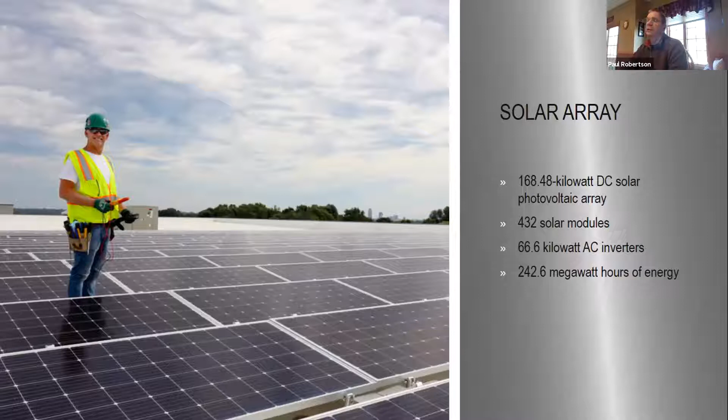Like I mentioned, if you want to advance the slide, Amanda. This system at 168 kW supplies about 24% of the office electrical needs, and we have a good sized office with lots of efficiencies in that office as well.

We do have a couple notes there about what that equates to, offsetting 20 million smartphone charges, 171,000 pounds of coal, and these are all annual figures. And based on the size of this array, this could annually supply the power to 20 homes in Iowa each year. So good sized array, and we were excited to put it up.

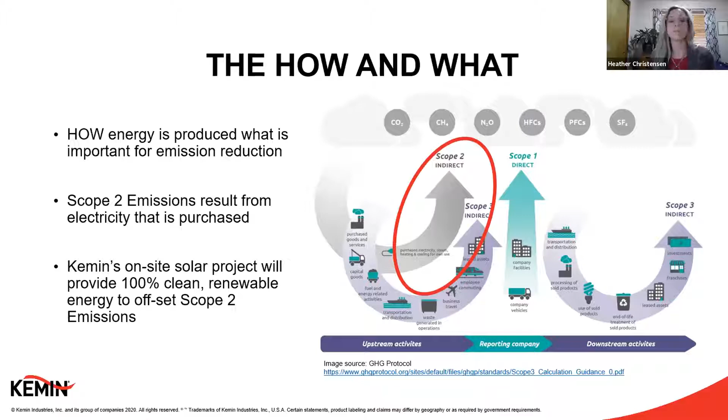The project details are that we are providing solar to approximately 90,000 square feet of our global headquarters. The construction is taking place in 2 phases. The first is a fixed tilt roof mounted array, and that system is 388 kW on our headquarters roof. The system starting construction and installation right now is another 331 kW, representing a single axis active tracking ground mounted system that will be completed by the end of the year. The total system size for this will be just over 720 kW when complete.

We've been working with Ideal Energy from Fairfield, a leading solar energy company in the Midwest. We've been able to tour some of the other facilities where they've done installations and see some of the options during the design plan for this.

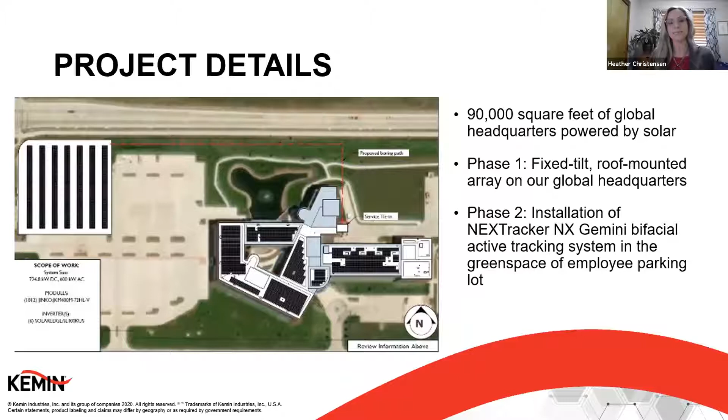Here is a nice shot where we're looking at our global headquarters building when construction was just beginning on the rooftop. In the background, you can see our crop sciences greenhouse, and then some of our other encapsulation facilities are off to the right of the screen there.

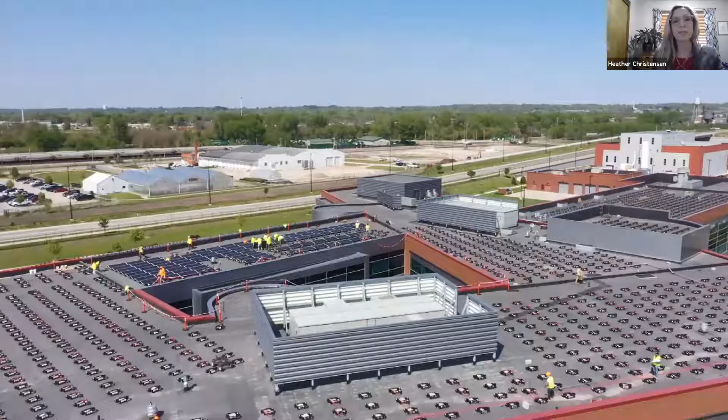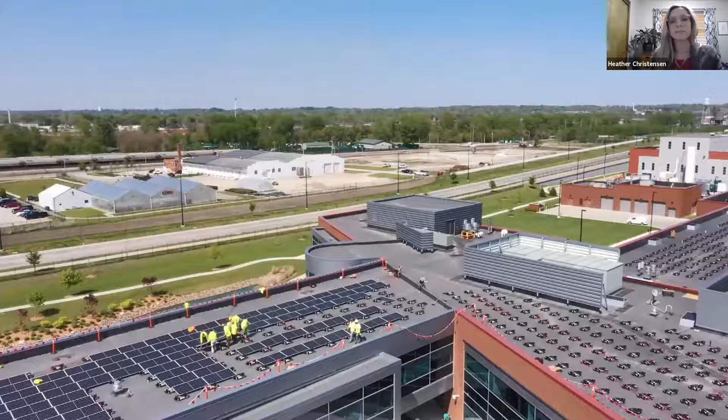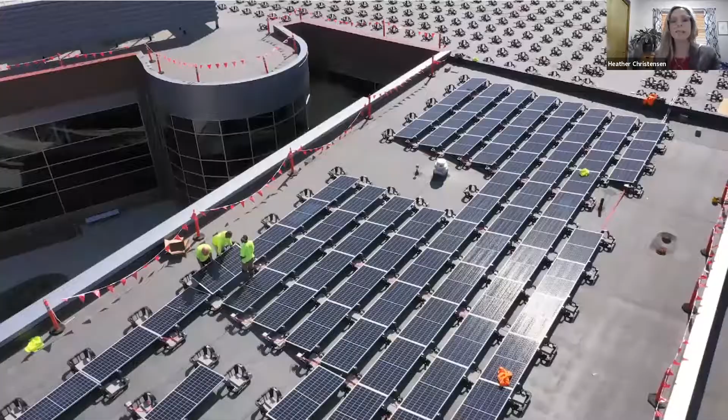Here's another view where we're looking down on the installation progress. Now I want you to pay attention here when we start the next video. This is looking from the corner of Martin Luther King and Southeast 18th Street, and you'll see that green space in the front of that parking lot there. This is our global headquarters again, the employee parking lot, and we can see a little bit of the rest of the campus here. We sit right on the front of the corporate campus. We have a lot of our manufacturing facilities that start to come into view in this scene as well, showing kind of how big the campus is.

The next shot here is the completed solar panels on the roof. This is, I believe, in July of this summer when the installation of the panels was complete, and we can see the coverage there on the roof.

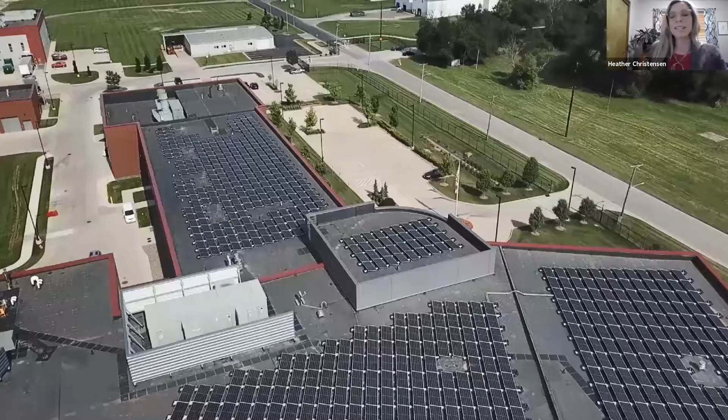Okay, so phase 2 of our project has just begun. They've been drilling the borings that go under the parking lot to the main electric, and they will start installing the panels here this next week. This is positioned in that green space that I showed you that is on the northeast corner of MLK and Southeast 18th.

These panels will also be bifacial, and that will add additional efficiency, especially on overcast and snowy days.

So quickly, I'll go over the project benefits that we're seeing from this. The solar installation is going to reduce Kemin's CO2 emissions by over 18,000 metric tons over 25 years. This is equivalent to 300,000 trees planted and grown for 10 years. This really demonstrates Kemin's commitment to the clean energy transition, and this is something that's hugely important to our customers, our employees, and our stakeholders.

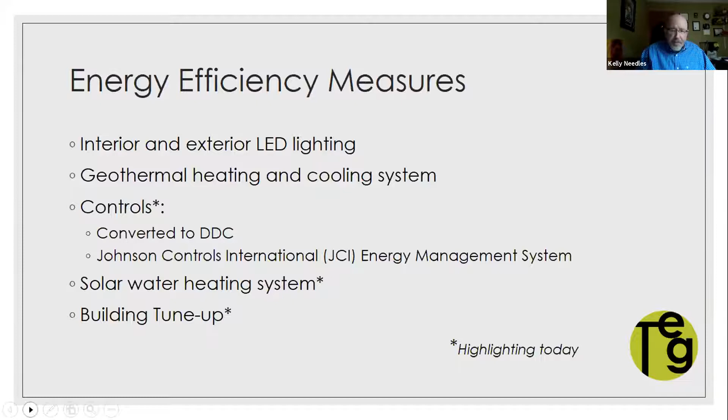Next slide. Got a few similar to the previous slide. Probably one of the biggest upgrades we made throughout the district is getting everything onto a Johnson Controls system, so we can have remote access from anywhere in the city, or even remotely, to adjust set points, respond to hot and cold calls, creature comfort issues, and adjust setback. Many schools within the district have different schedules based on after-hour activities, community use, and so forth, and this helps us stay ahead of things from a preventive maintenance standpoint.

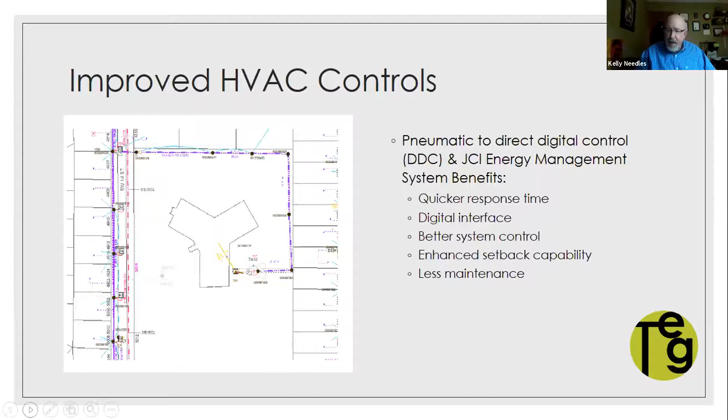Next slide. Some economic things to look at relative to this particular building - we've got energy savings that we identified.

Something Jeremy mentioned during the Waldinger presentation - we've modeled, from an energy modeling standpoint, all of the Des Moines school buildings. So we have access to go in and tweak those models and identify economic impacts from potential improvements. Some of the things we found during our building tune-up walkthroughs: when a new gym was added, there were ventilation and exhaust fan issues, and doors open to that space that should have been closed, causing increased energy use. These are low cost, no cost improvements that don't come with significant capital expense, but do save the public money.

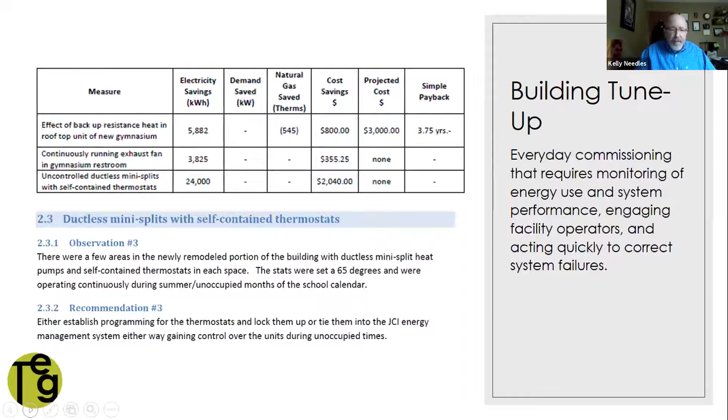This is the fairly small solar thermal project. We entertained two solar thermal initiatives within the district. One was the Hoover High School pool, which was an exorbitant facility, and to provide solar thermal hot water to that system we would have had to cover the majority of the real estate at the Hoover Meredith campus. So the decision was made not to pursue that one, and instead investigate domestic hot water systems similar to the one you see here at Wright.

Weeks Middle School, I think - the one out by the zoo. Anyway, there are two solar thermal systems, one about twice the size of this one, and this particular one that we chose. These pictures are from a case study we developed for IEDA, who are also interested in the technology. One of the good things about this project is it came with significant savings, but it was also a package system the district could buy and install themselves. It came with a fairly low payback in our opinion - a little less than 9 years, a little more than 8. Given all the other energy saving projects the district has entertained, an 8-year payback is actually pretty good for Des Moines schools.

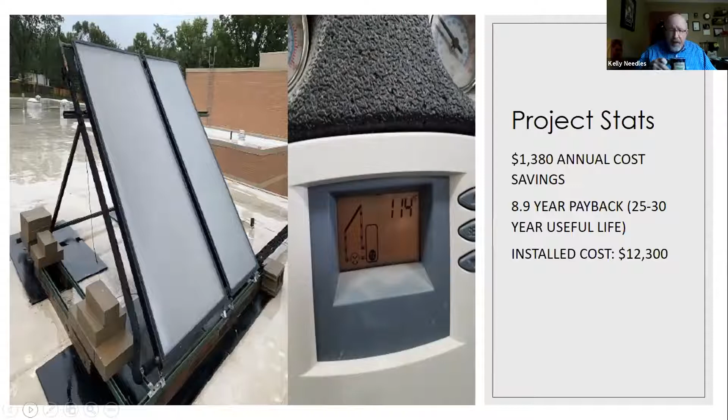All the 2- and 3-year payback projects have been kind of gobbled up. So as we continue to try to continuously improve from an energy use standpoint on an annual basis, this is something I believe they'll be committed to looking at, primarily in all-electric facilities where fossil fuel is not needed.

Next slide, if you can. This is just a diagram of the 120 gallon system, to give you an idea how it works. Very simple to use, very simple to install.

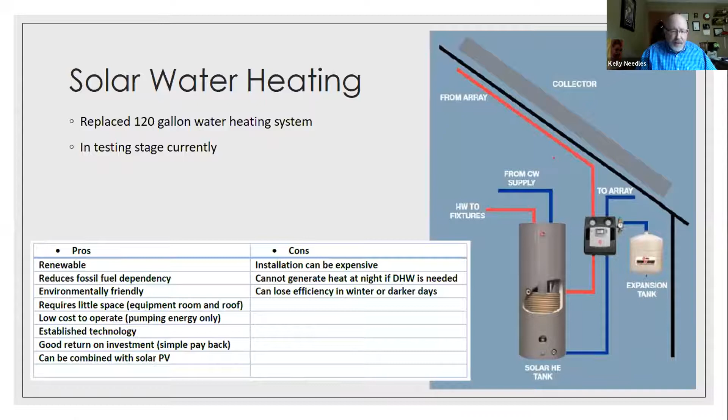Next slide. I think it's important that we highlight Des Moines Schools' commitment from an ethical standpoint to efficiency. Many times when we do these presentations, we're identifying significant capital improvements, simple paybacks, energy savings - we've all seen that.

Des Moines Schools looks at efficiency from an ongoing review of every single building. If you go onto the Des Moines Schools website, you'll see they have an energy report card that is updated for every building within the district. They show comparisons from month to month, this month this year to this month last year kind of thing.

They're very action oriented. It gives you an idea of how committed they are, even from a staff standpoint. If a faculty member within the district wants a coffee pot, a microwave, or a space heater, they have to pay for it, they have to pay for the energy that goes into it. So they know that, and they seem committed to it. We've even got faculty and staff buy-in, and then obviously being very, very action oriented.

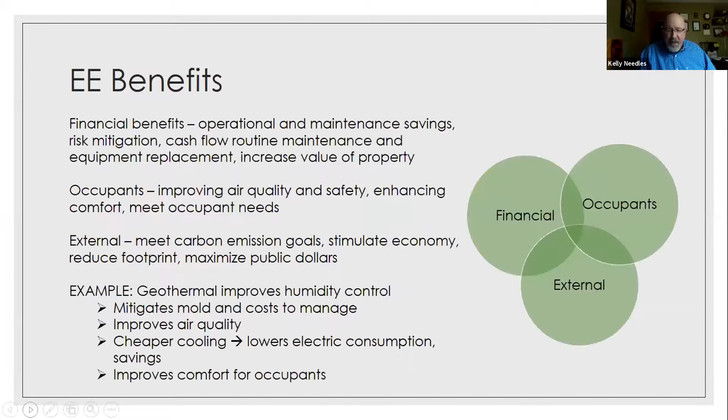We meet every week, even virtually now, to talk about what can be done to save money on an ongoing basis. So anyway, that's the extent of our presentation. Happy to answer any questions that you guys might have.

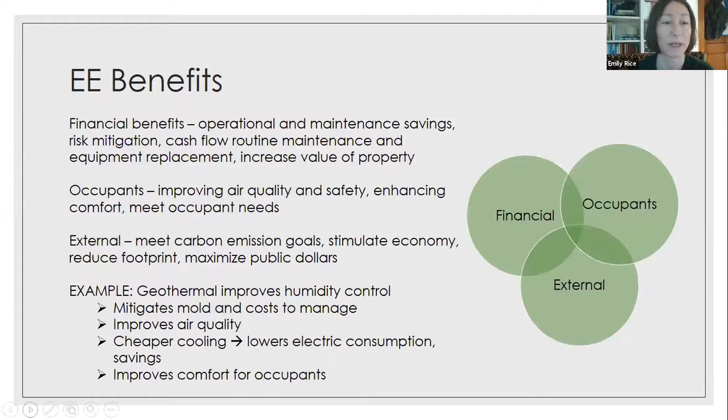I'll note too, Kelly already mentioned this a little bit, but sometimes we're looking at the more attractive, larger scale projects, but really I think the true winner with DMPS is the slow and steady. The fact that they're constantly monitoring and making tweaks helps them get ahead of things that could be huge energy dumps or big preventative maintenance issues.

I think the motivation for DMPS is 3-pronged. They know that it has a significant financial benefit. They're thinking about the people that are using their buildings and the community around them, and they want the space to be comfortable, productive, and safe. Then there's the external motivation - they're definitely driven by the fact that they want to reduce their carbon footprint and be good stewards, and there's the added benefit of stimulating the economy when they continue to implement these projects.

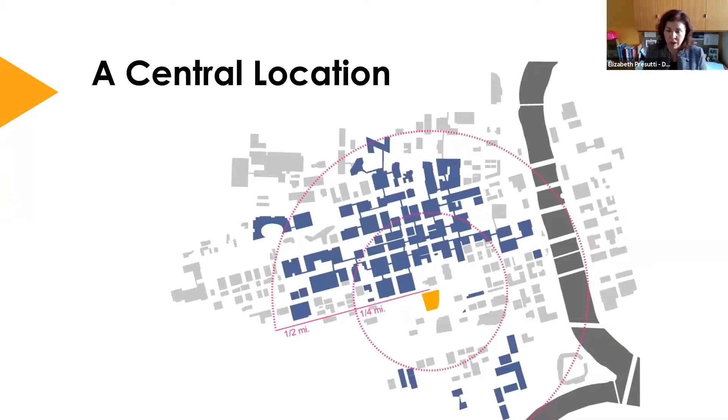From the inception of this facility, we really wanted to make sure it was as sustainable as possible to emulate the sustainability of public transportation. The facility is very centrally located in Des Moines, very walkable, and we were able to utilize an undeveloped site and actually reduce some parking spaces in Des Moines. The lot had a warehouse on it, as well as a parking lot that was utilized for Wells Fargo.

We also incorporated a really smart design. We looked at how we best use stormwater, integrated geothermal heating and cooling systems, and have a variety of different transportation options, of course, solar panels, recycling, and all the things you would anticipate in a sustainable facility.

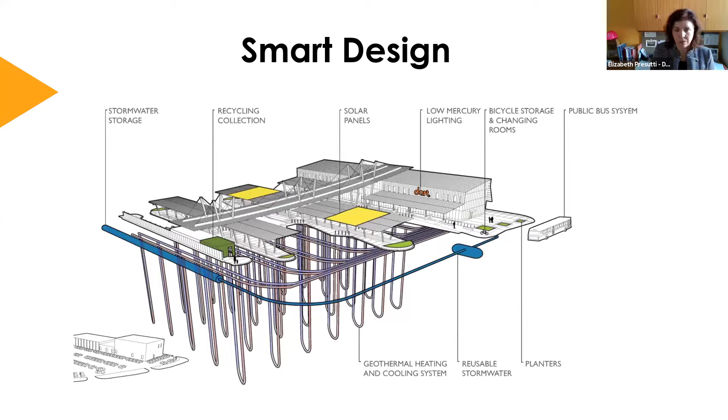We really worked to ensure that we had a lot of daylight and sun access. Our operations and maintenance facility has like 4 windows in it, and as we built this, we really wanted to make sure we had a lot of windows. So 93% of the space is daylit, and 90% of the space within the building, somebody can view the outside.

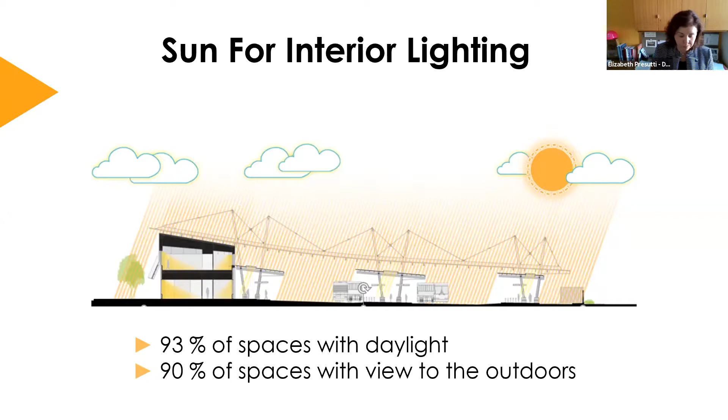Again, we use sun for power. We have 178 solar panels, and since the building opened, we've produced over 375,000 kilowatt hours. We've estimated that cost savings to be over $40,000. We've also seen a reduction of CO2 by over 317,000 pounds, or 158 tons.

On a sunny day when it's 65 or 70 degrees outside, we do hit net zero and overproduce enough to get a payback from MidAmerican Energy. Our investment on the solar arrays as part of that project at that time was just over $200,000.

On an average month, our gas bill is about $30, and we do run 2 instant hot water heaters and a backup generator, which is also on natural gas.

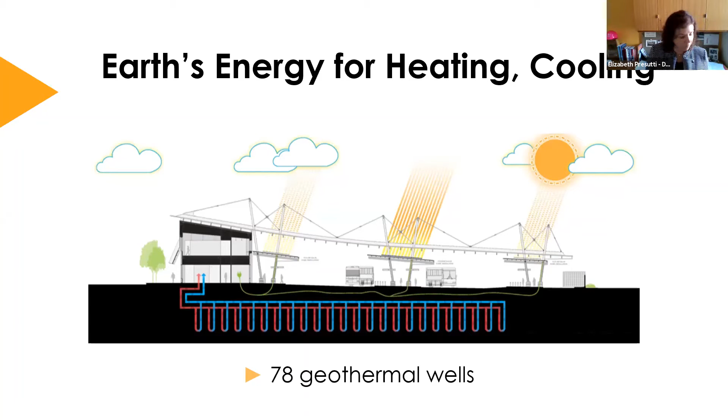We also thought about the stormwater component, given the roof space and the impervious surface on the site. So we have a 20,000 gallon cistern system and also a 500 gallon internal tank.

We've saved over 4.8 million gallons of water in the 8 years that we've been open, and estimate that to be a savings of around $28,000. The investment on that cistern was $130,000, but we believe that being able to reuse that water and not put it into the stormwater system has been helpful for everyone.

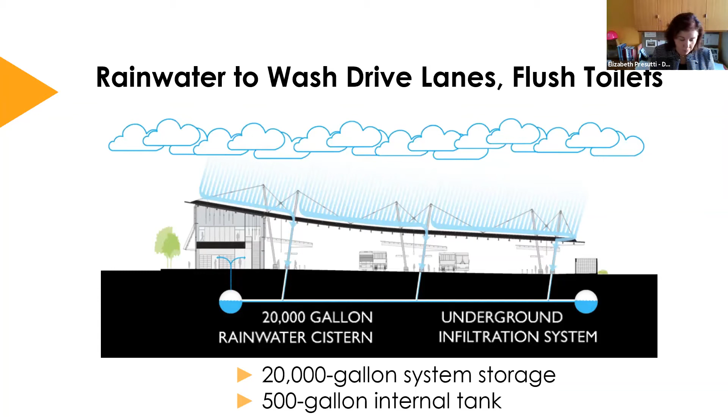We also really worked to ensure that we were thinking about the products being used to build the facility. 24% of the construction materials were recycled, and 28% of those materials were manufactured regionally.

With the facility, we really aimed to create a place that the community could be proud of, that our customers could be proud of and find utility in, to connect them to everywhere they need to go, and to all of our member communities so that they can get to jobs, work, school, and medical appointments.

I also want to talk a little bit about our electric bus pilot program. This week was a big week for us. On Tuesday, we put all of our electric buses into service in downtown Des Moines. They are primarily running on Route 60, which is our University Ingersoll loop.

We have purchased 7 electric buses, with a range that we're hopeful to get over 200 miles a day on a charge for the vehicle. As part of the project, we did have to do a significant electric...